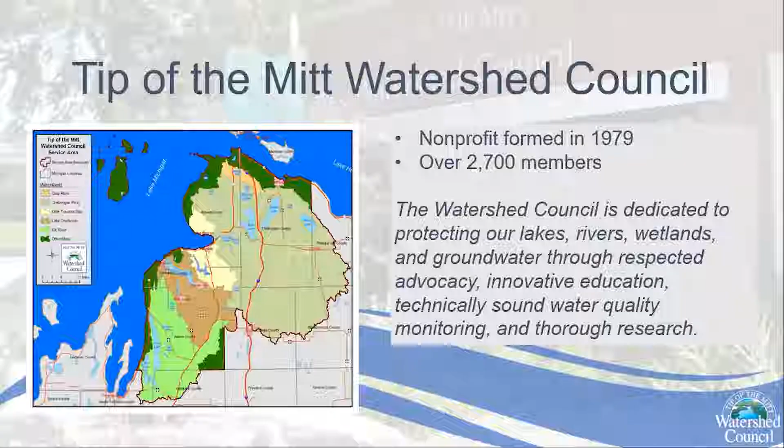The issue of Line 5 began way back in July 2010. That was when Enbridge's pipeline in southern Michigan ruptured, releasing heavy crude oil into the Talmadge Creek and Kalamazoo River. More than approximately 1.15 million gallons of oil was recovered from the river, according to the EPA. The cleanup and restoration of some 40 miles of the river took about 5 years to complete and cost Enbridge approximately $1.21 billion. This failure represented one of the largest inland oil spills affecting waterways in U.S. history and is one of the most expensive cleanups to date.

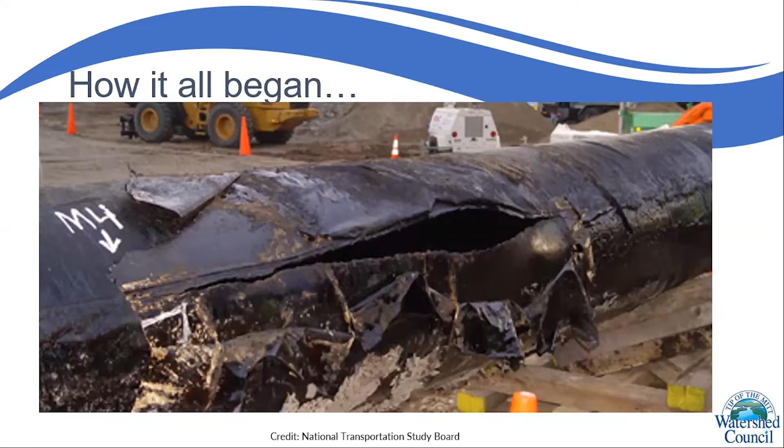In light of this spill, it was not surprising that public and governmental attention turned to the older pipelines running throughout Michigan, including Line 5 under the Straits of Mackinac, and began looking at the devastating ecological and economic damage that would occur if any of these pipelines failed.

To look at Line 5 in the larger context of pipeline infrastructure, Enbridge operates the world's longest crude oil and liquid transportation system across the US and Canada. Line 5 is part of what is called the mainline system. With nearly 8,600 miles of active pipe, Enbridge's mainline pipeline network has the capacity to transport 2.85 million barrels a day of light and heavy crude oil.

The mainline originates in Edmonton, Alberta, and extends east across the prairies. The pipeline crosses the US-Canadian border in Manitoba, where it joins the Enbridge Lakehead system, aptly named because it goes right around and through our Great Lakes. At Clearbrook, Minnesota, the mainline receives US crude oil from the Enbridge North Dakota pipeline and connects with the Minnesota pipeline that can deliver crude oil to refineries in Minnesota and Illinois.

At Superior, Wisconsin, the mainline branches into two segments. The northern pipeline passes through northern Wisconsin and Michigan before crossing into Ontario at Sarnia. The southern leg contours south of Lake Michigan to Lockport in Chicago and Illinois before turning northeast and passing through Indiana and southern Michigan, where it also re-enters Canada at Sarnia, Ontario.

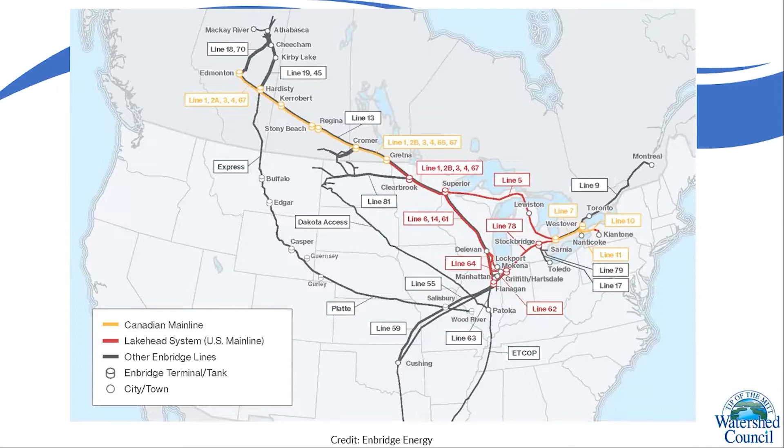Line 5 is a 645-mile petroleum pipeline owned and operated by Enbridge Energy Limited Partnership. 547 miles of that pipeline are in Michigan. It runs from Superior, Wisconsin, across the UP, through northern Michigan, down to the Thumb region, and over to Sarnia, Ontario. Through this path, the pipeline crosses 19 of Michigan's 83 counties, representing approximately 9% of the state population.

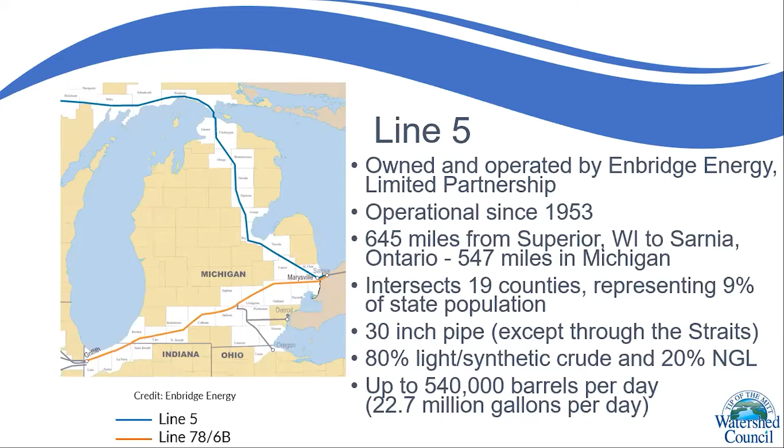Line 5 is 30 inches in diameter, except when crossing the Straits of Mackinac, where it divides into two 20-inch diameter pipelines. The line became operational in 1953 and carries up to 540,000 barrels, or 22.7 million gallons, of light crude, synthetic crude, and natural gas liquids per day.

At the Straits of Mackinac, Line 5 is divided into two parallel pipelines, each 20 inches in diameter, extending more than 4 miles across the lake bottom. The pipelines are buried 15 feet deep until about 70 feet of water depth. Deeper than that, the pipes were laid directly on the lake bottom.

The 20-inch diameter pipes in the Straits have a wall thickness of approximately 0.812 inches, which is much thicker than the rest of the pipeline infrastructure.

The maximum operating pressure for the Straits pipeline is 600 PSI, and the pipelines are generally operated around 200 PSI, with a daily range of 0 to 300 PSI. The portions of the pipeline in the Straits have automatic shutoff valves, which will shut off automatically if the pressure drops.

These automatic shutoff valves take approximately 3 minutes to close. There's also electric backup generation at the Straits to ensure the valves can operate during a power outage. According to Enbridge, if the valves close correctly, the approximate volume of oil released from a single pipeline between those valves would be 4,950 barrels.

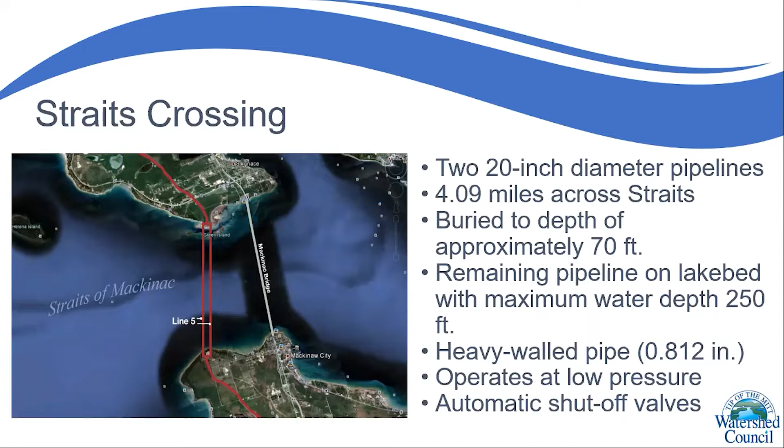That equates to 207,900 gallons. An independent risk analysis commissioned by the state of Michigan found that a worst case scenario release of 58,000 barrels, or 2.4 million gallons of oil, from a double rupture of the Straits pipeline would result in nearly $1.9 billion in costs for cleanup, property loss, lost income from tourism, recreation, and other damages.

Line 5 is most notably known for crossing the Straits of Mackinac, but it also crosses under multiple rivers and streams, goes through miles of wetlands, and crosses under many of our sparkling inland lakes. It crosses approximately 400 water bodies across the state of Michigan.

In northern Michigan, Line 5 crosses the Indian River, the Little Sturgeon River, Pigeon River, and Upper Black River, and traverses within a few miles or less of Twin Lake, Paradise Lake, Mud Lake, Monroe Lake, Mullet Lake, Douglas Lake, and Burt Lake. These inland portions can pose just as great, if not greater, threat to our waters due to basic construction, operation, and maintenance of the line.

As mentioned, the wall thickness in the Straits was thicker than the rest of the line. The inland pipeline is only 0.281 inches thick, compared to 0.813 inches at the Straits. Along with the thinner pipe, it operates at a higher pressure. In addition, it has a side seam, which the Straits portion of pipe does not have. The seam can be subject to stress cracking and could cause an inland pipe to be more vulnerable.

The inland portion is also not subject to the same inspection frequencies as the Straits. U.S. Coast Guard personnel and local emergency managers both pointed to the stretch of Line 5 along US Highway 2 near Lake Michigan's northern shore as their greatest concern. They cited as primary concerns less robust technology, such as pipeline wall thickness and monitoring equipment, higher vulnerability to an errant strike, potential access problems for containment and cleanup equipment, and difficult terrain and environment for cleanup activities.

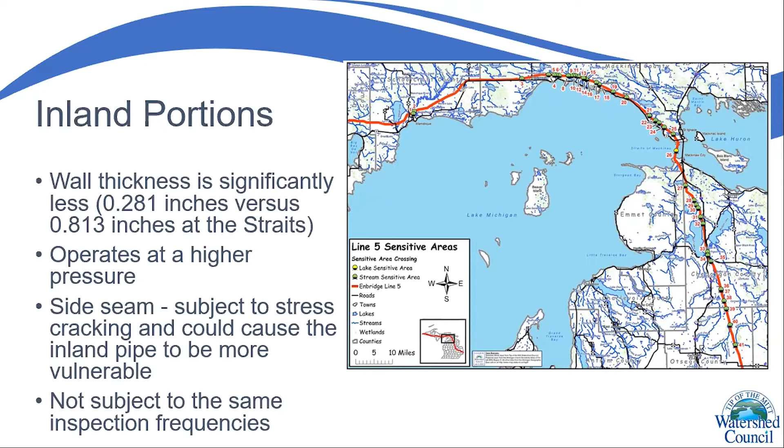On April 1st, 2018, we were lucky. We managed to somehow avoid a complete catastrophe when a 6-ton anchor from a barge and tugboat was dragged through the Straits of Mackinac. The crew had no clue it was being dragged on the lake bed until nearly 2 days later when it came to port.

The anchor dented Enbridge Energy's dual Line 5 oil pipelines and sliced American Transmission Company's 2 underwater power cables, causing $100 million in damage to the cables and releasing 600 gallons of dielectric fluid, basically mineral oil, into the Straits. Thankfully, there was minimal risk to the fisheries and wildlife.

On Line 5, there were 2 dents in the west line and 1 in the east line. The coating was also damaged in 4 areas, with it down to bare metal in at least 2 spots.

As a result, the Michigan Department of Natural Resources immediately issued a no-anchor rule. That was followed by the US Coast Guard approving in 2018 a restricted navigation area, effectively designating it as a no-anchor zone. No vessel may now anchor or loiter within the restricted navigation area at any time unless they get permission from the captain of the port in Sault Ste. Marie. However, in an emergency, vessels are allowed to deviate from this regulation if deemed necessary to avoid endangering people, the environment, or property.

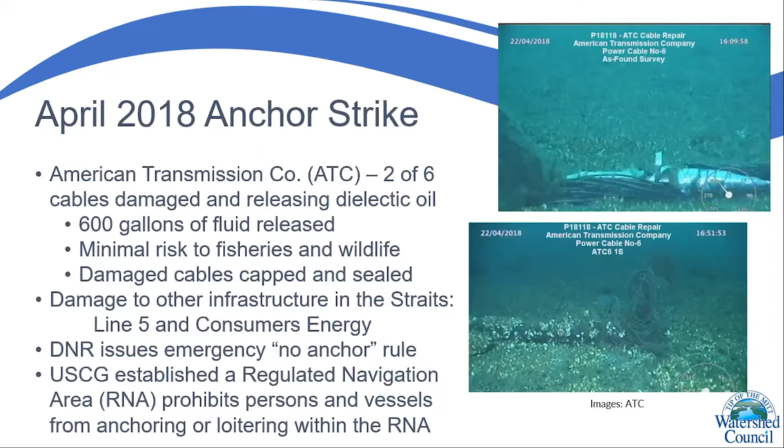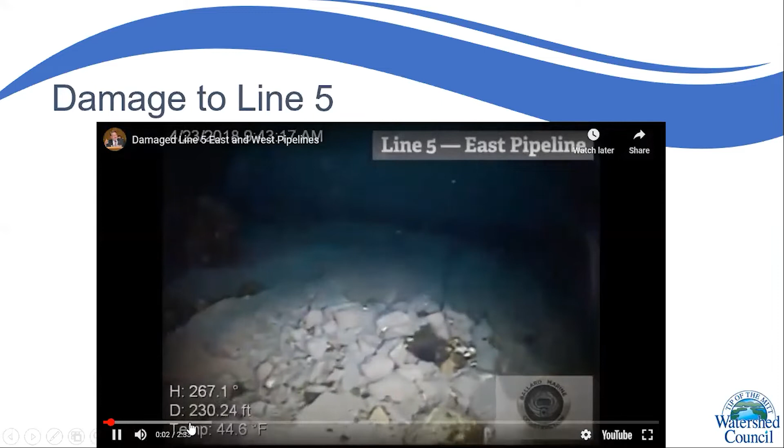Here's a video showing some of the damage, sped up for the sake of time. You can see this is the east line, with the biota missing from the pipeline where the anchor hit, and an area where the coating has been taken off. Obviously, we were extremely lucky that nothing more significant happened.

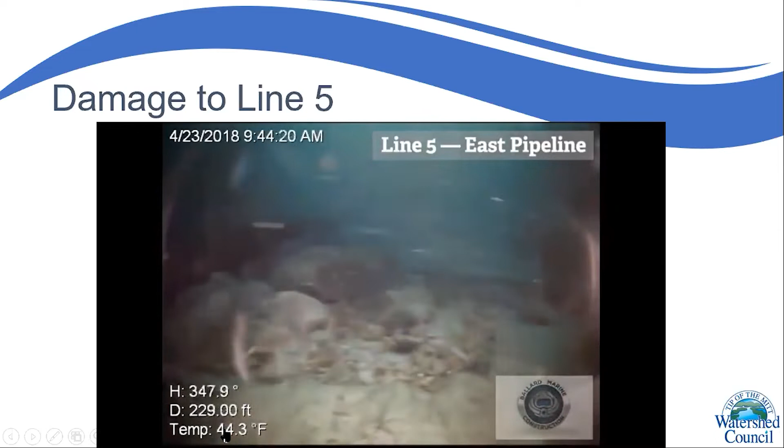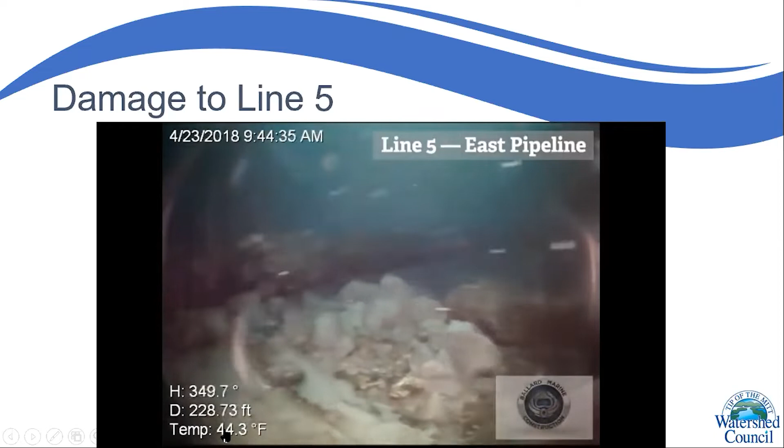There's a big difference between the biota on the left and right versus where it's showing where the anchor struck.

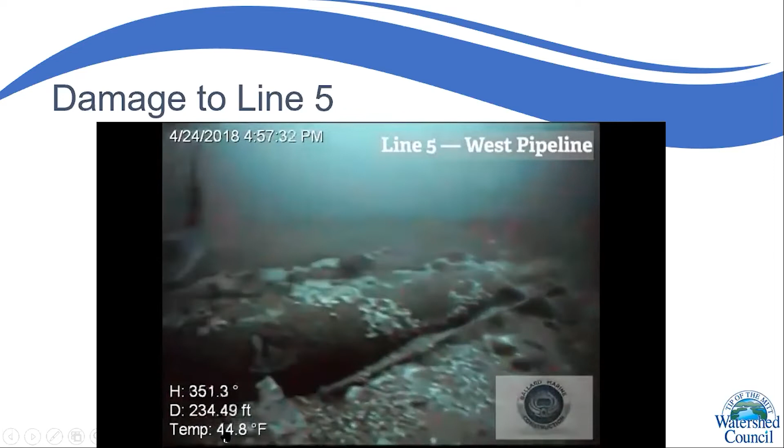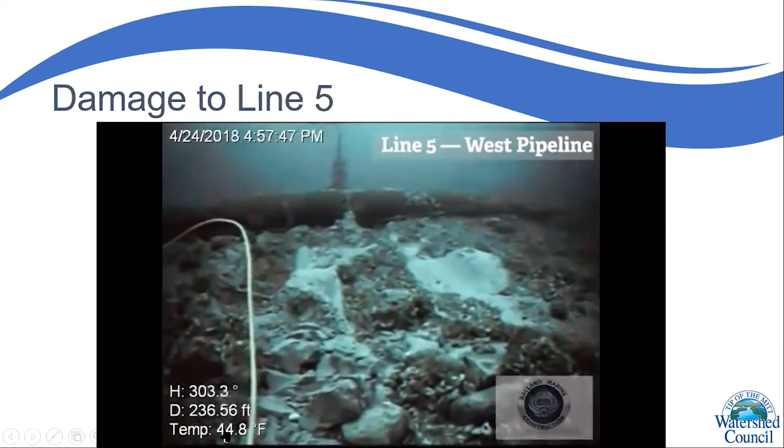Now that moves over to the west line. This footage was obtained by Enbridge, by one of their contractors after the incident. You can see the damage to the bottom land of the lake caused by the anchor being dragged.

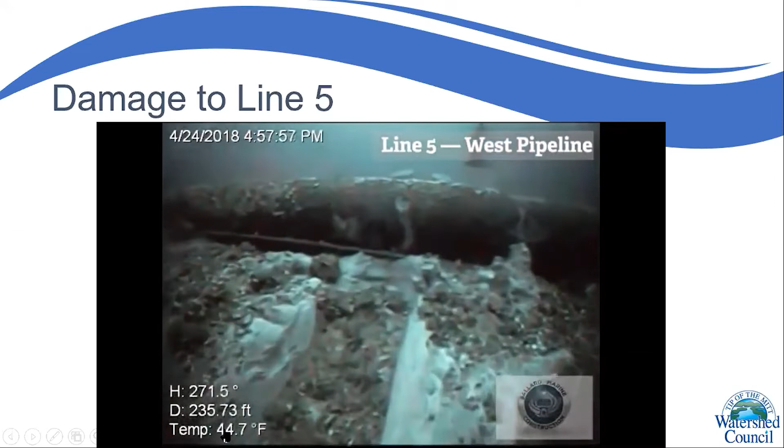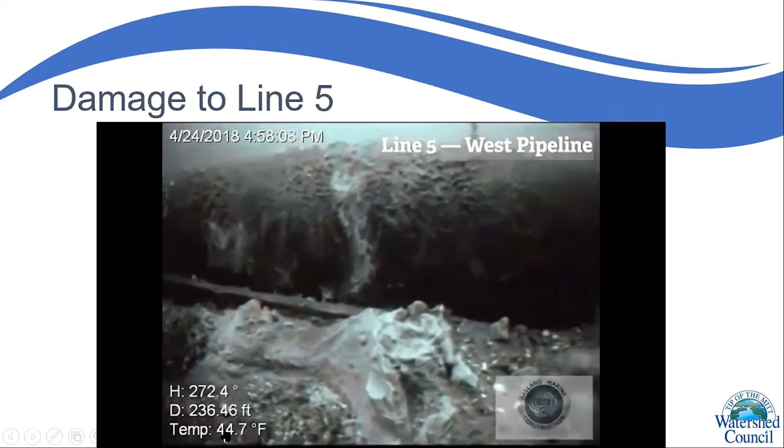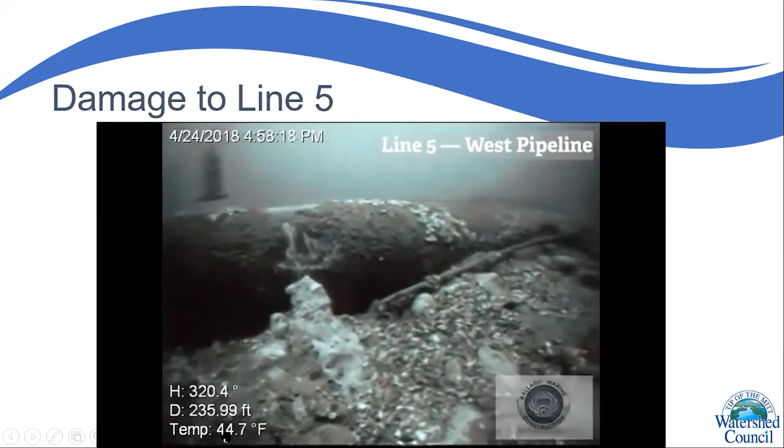Clearly, that's where the anchor hit. Once again, you can see not only the biota, the mussels, are missing, but as it gets close, the coating is missing and it's down to bare steel.

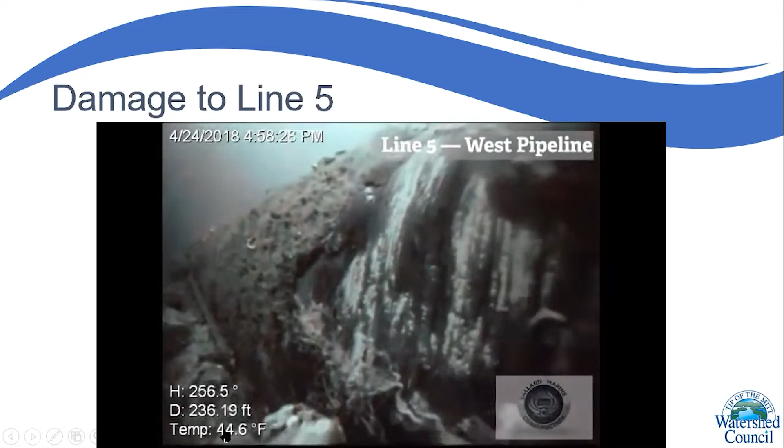So Enbridge responded to this incident by instituting a number of measures to try and enhance safety in the straits, basically trying to avoid future anchor strikes. They put in a number of measures, including patrol vessels that will monitor ships in the straits to determine if their anchors are up.

In addition, Enbridge has put cameras at the straits on Enbridge facilities, which are onshore, to monitor ship traffic 24 hours a day, 7 days a week. This is extremely important for the times when these Enbridge support vessels are unable to actually be out on the water.

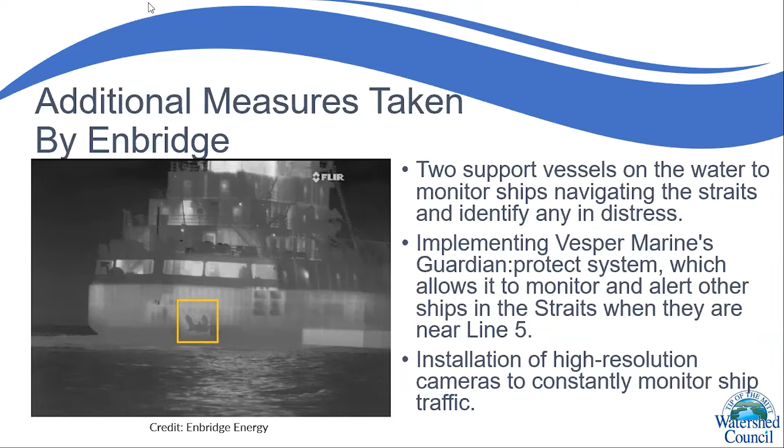There were a number of task forces and boards, including the Pipeline Safety Advisory Board, which I sat on for 3 years, that worked to identify measures to minimize the risk and improve emergency management for pipelines, not only Line 5, but pipelines throughout the state of Michigan.

During that process, the state under Governor Snyder began signing agreements with Enbridge. In the end, 3 agreements were signed covering a variety of issues. The agreements covered when the pipeline had to be temporarily shut down, replacement of the pipeline in the St. Clair River, inclusion of radar systems to monitor wave heights in real time, and also required Enbridge to carry $1.8 billion in financial assurances in the event of a spill.

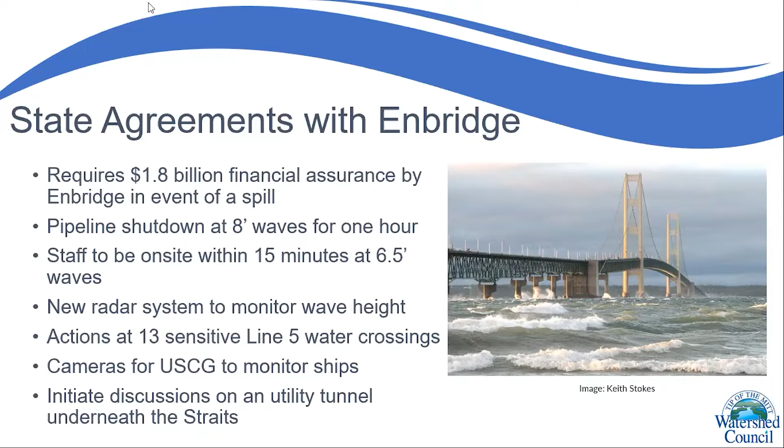But most importantly, the state and Enbridge announced in the second agreement that the two entities would discuss a further agreement around the design, construction, operation, management, and maintenance of a tunnel under the straits for the replacement of the dual pipelines. This was really the official beginning of the Great Lakes Tunnel project.

It was further solidified in December of 2018 when the Mackinac Straits Corridor Authority approved an agreement with Enbridge to build the tunnel beneath the Straits of Mackinac. That agreement was approved by the Mackinac Straits Corridor Authority during their very first meeting, which was just one week after former Governor Rick Snyder signed a lame duck bill that created the 3-person panel.

The tunnel agreement contains milestones for construction progress, as well as financial penalties if Enbridge misses deadlines that are within their control. So it would not include delay of permits or lawsuits.

Once the tunnel is complete, ownership will be turned over to the Mackinac Straits Corridor Authority, which will be able to lease space within the tunnel to Enbridge or other utilities if deemed feasible. Enbridge will get a 99-year lease as part of this agreement.

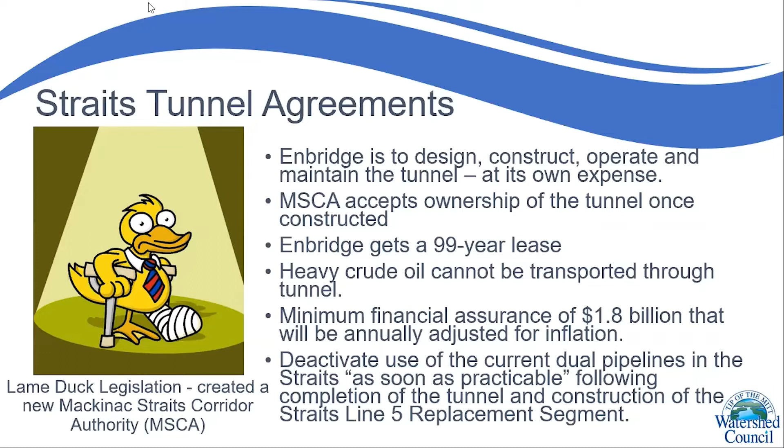One of the primary arguments made by Enbridge and others is the need for the pipeline to maintain the propane supply for the UP. To address this concern, Governor Whitmer created the UP Energy Task Force by executive order. The charge of the task force is to assess the UP's overall energy needs and how they're currently being met, as well as identifying and evaluating potential changes to the energy supply and distribution, looking at the economic, environmental, and other impacts of those changes, as well as alternatives to meet the UP's energy needs.

The task force released part 1 of a 2-part report, focused on short-term steps the state could take in reaction to a disruption of propane supply to Michigan customers. The second part will evaluate the UP's energy needs through a much broader lens to ensure long-term needs are met reliably, affordably, and in an environmentally sound manner.

The first report included specific recommendations to enhance the reliability of propane supply in the UP, and a detailed analysis of alternative means of supplying propane if the current supply, which relies in part on Line 5, changes. Key findings showed that shutting down Line 5 need not cause propane shortages or large price spikes, which is often claimed.

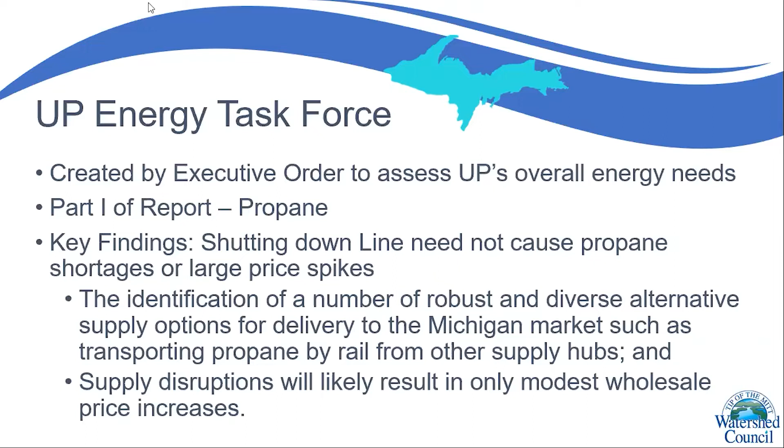Geotechnical borings was one of the next big things Enbridge conducted for the tunnel project. Enbridge completed a $40 million geotechnical investigation in the Straits, finished by November 2019. The boring work was to get sediment and rock samples from the lake bed to determine the feasibility of the tunnel and guide its design and that of the tunnel boring machine.

Samples were taken in 27 locations: 7 were on shore, 6 were near shore, and 14 were in deep water.

There was recently a report by an independent contractor, Jacobs, hired to analyze the geotechnical investigation and assess the level of risk of tunneling based on it. It concluded the investigation was insufficient and does not adequately characterize the anticipated ground conditions on the site. A significant span of the tunnel alignment does not have any borings that reached the proposed tunnel depth, which could lead to significant challenges when tunneling.

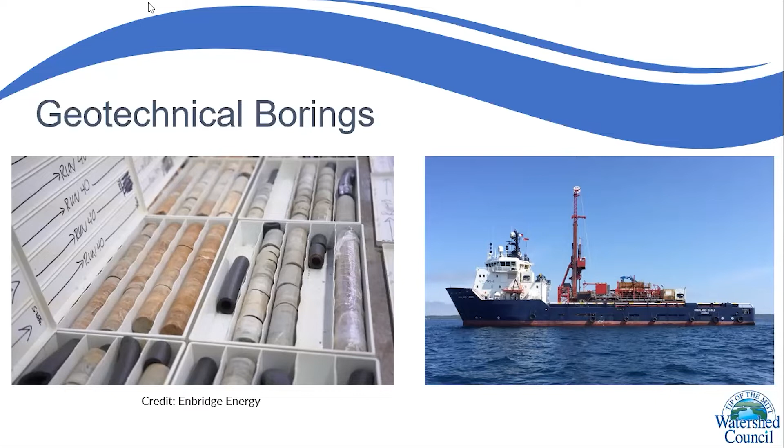In June of last year, there was another incident when Enbridge was working on Line 5 in the Straits. They discovered a screw anchor support had shifted from its original position. This support was installed in 2018 on the east leg, and it lied about 150 feet away from spots on the pipeline where the protective coating had worn away and bare metal was exposed. Enbridge was ordered to shut down both the east and west legs of the pipeline by a judge.

They were allowed to restart the west leg to perform an inline inspection, running what they call a pig through the line to check for integrity issues, and were allowed to continue operating that line based on the results of that inspection.

The east line, where the damage was found, had to remain closed until the federal agency, the Pipeline and Hazardous Materials Safety Administration, completed an investigation. After being shut down on June 19th due to the damage found, Enbridge was allowed to restart the east leg of Line 5 on September 9th, after the agency noted it had not identified any integrity issues.

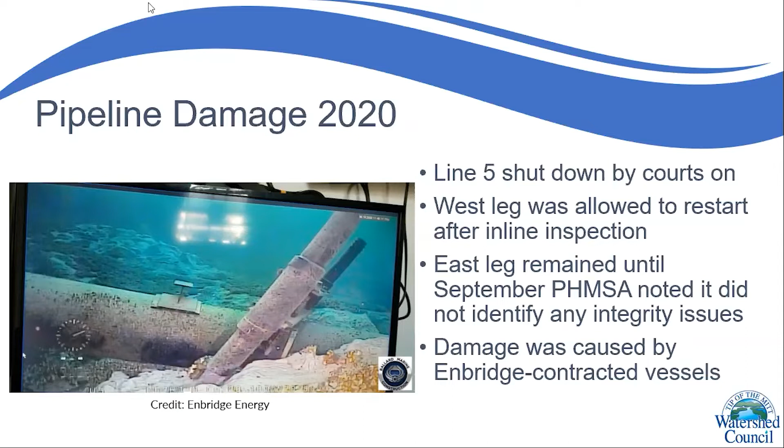It's also worthwhile to note that during the more than 3-month shutdown, there was no gas shortage and no impact on gas prices. According to an Enbridge fact sheet, a temporary shutdown would have severe consequences for Michigan's economy and result in about 45% less crude flowing to refineries in our region. Importantly, this did not come to fruition during the temporary and partial shutdown.

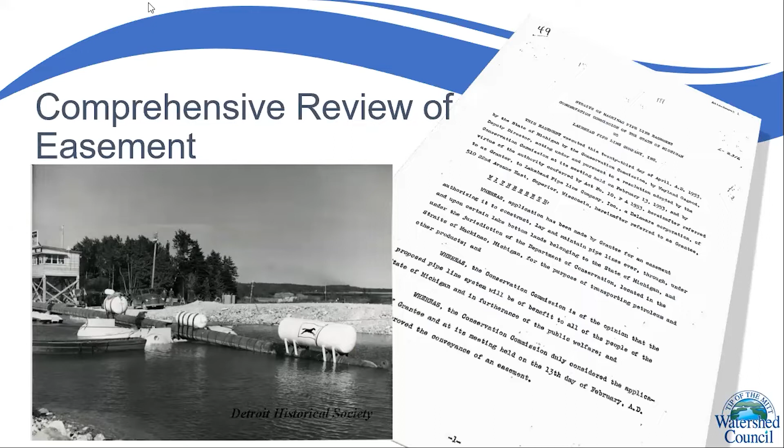After these multiple incidents, Governor Whitmer directed the Michigan Department of Natural Resources to begin a comprehensive review of Enbridge's compliance with the 1953 easement. The easement created the terms and conditions under which Enbridge could operate the dual pipelines on the bottomlands of the Great Lakes.

According to the state, one of the provisions is the due care provision, in which Enbridge is expected to, at all times, exercise the due care of a reasonably prudent person for the safety and welfare of all persons and of all public and private property.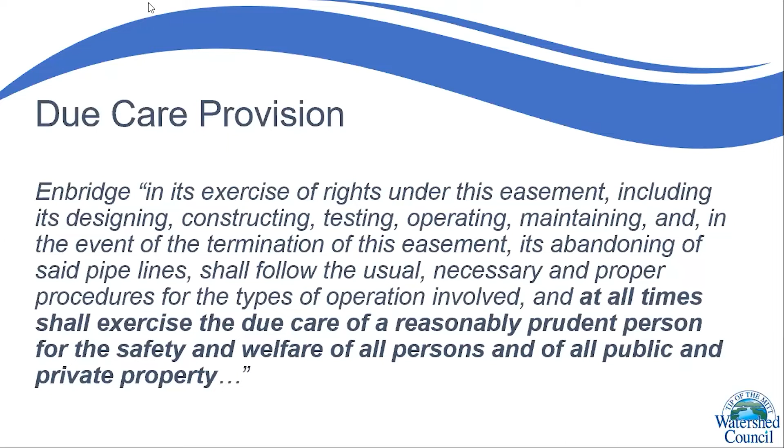According to the state, Enbridge has failed for decades to meet its compliance and due care obligations under the easement, and it remains in violation of those obligations. There's nothing Enbridge can do to change its past behavior and disregard for its duties under the easement, and its breaches of the easement's terms and conditions cannot be corrected or otherwise cured.

So the state has said Enbridge has not and is not exercising due care in operating the pipeline. The easement requires that each pipeline be physically supported, meaning it either rests on the lake bed or is supported by some other structure or device, such as these screw anchors, at least every 75 feet. That's to protect the structural integrity of the pipeline from stresses and vibrations caused by the strong currents surrounding it. The state has said that for virtually the entire life of the easement, Enbridge has ignored the 75-foot span requirement.

Documents provided by Enbridge confirm that since at least 1963 and continuing through 2012, Enbridge has known that multiple unsupported spans exceeded the 75-feet limit, but failed to take remedial action to address the non-compliance. The longest span was noted at 286 feet. And between 2005 and 2016, there were nearly 250 instances where spans exceeded 75 feet.

It's also noted that Enbridge failed to take timely corrective action. There were delays of up to 3 to 5 years to repair 17 non-compliant spans, 7 years to repair 11 spans, and another 9 years to repair 17 spans. Just to make sure everyone understands what we're talking about...

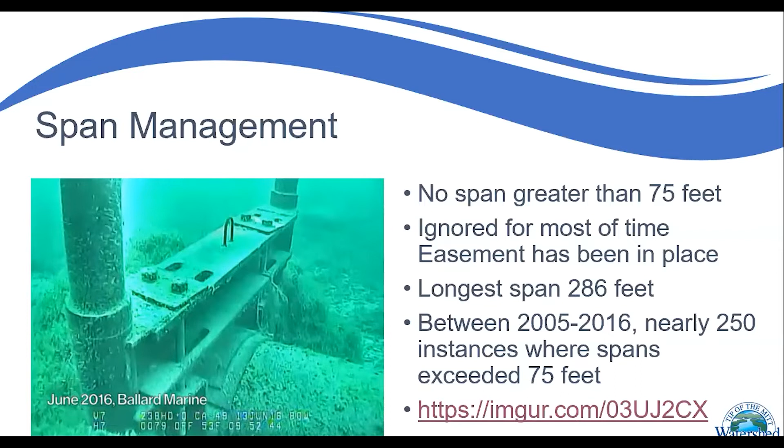So again, you can just see how the anchors have been added over the years.

Coating concerns: the easement requires Enbridge to maintain a multi-layer coating on the pipelines. This protective coating is intended to prevent the steel from being exposed to environmental factors that would cause corrosion or other physical damage. Since at least 2003 and continuing until 2014, Enbridge was on notice that the heavy biota accumulation, the invasive mussels you saw earlier in the video, on the Straits pipeline made it impossible to do a detailed analysis of the integrity of the coating.

In reading a report Enbridge submitted to the EPA, I came across the word 'holiday.' Most of us think of holiday as a good thing, but in this industry, it means an area where pipeline anti-corrosion coating is missing.

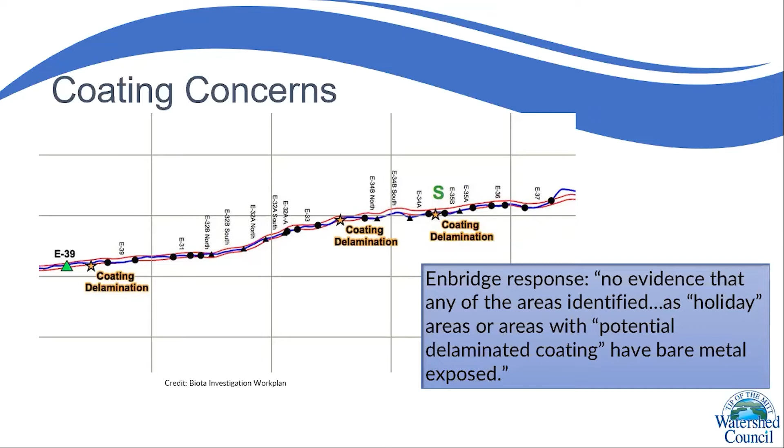Enbridge's initial response when this was found was that there is no evidence that any of the areas identified as holidays, or areas with potential delaminated coating, have bare metal exposed. But after initially telling the state there was no bare steel, Enbridge revealed, after additional investigation, that there were in fact coating gaps, more than originally announced, some as large as 16 inches.

That included bare steel, as well as a white calcareous deposit found along many segments of the pipeline. In fact, Enbridge knew of these issues for 3 years prior and did not tell the state, nor did they attempt to address them.

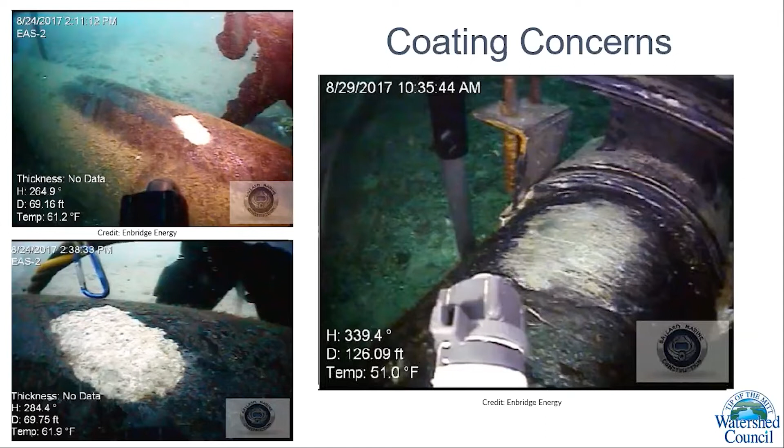The easement includes a condition that the minimum curvature of any section of the pipe shall be no less than 2,050 feet radius. The pipe on the bottom of the straits is not straight because the bottom of the straits is not straight, so this condition relating to pipeline curvature limits stresses placed upon it. Inspection reports identified 20 to 25 exceedances of the easement's minimum pipe curvature requirements.

According to the state, Enbridge ignored the curvature mandate of the easement, perhaps from the very beginning with installation, and non-compliance with the curvature condition continues today and remains uncorrected.

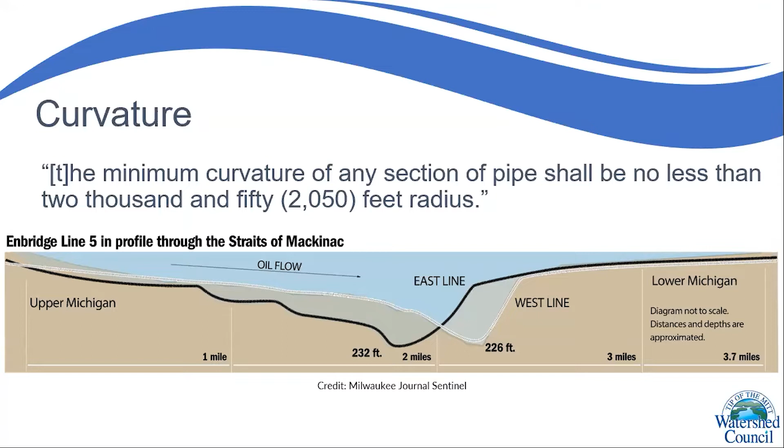After the 15-month review, the governor and DNR director notified Enbridge that the 1953 easement allowing it to operate in the straits is being revoked and terminated. They also filed a lawsuit asking the Ingham County Court to recognize the validity of that action.

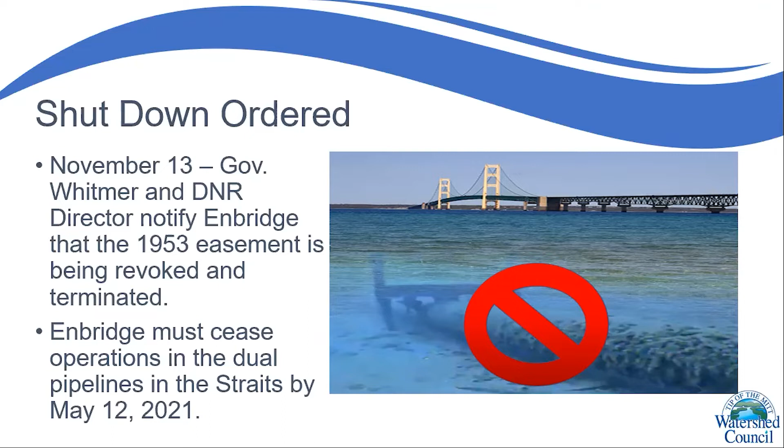The state is revoking the easement for violation of the public trust doctrine, given the unreasonable risk that continued operation of the dual pipelines poses to the Great Lakes, which the state holds in trust for the citizens of Michigan. Transporting millions of gallons of petroleum products every day through 67-year-old pipelines that lie exposed across the entire span of a busy shipping channel presents an extraordinary and unacceptable risk.

The dual pipelines are vulnerable to anchor strikes and similar dangerous impacts, along with the inherent risks that come with pipeline operations. The state is also terminating the easement based on Enbridge's persistent and incurable violations of the easement's terms and conditions. The notice requires Enbridge to cease operations by May 12th of this year, allowing for an orderly transition that protects Michigan's energy needs over the coming months.

Enbridge replied to the state of Michigan, stating they will not shut down the pipeline in May. In fact, Enbridge then sued Governor Whitmer and the DNR in federal court to challenge the state's decision to revoke and terminate the easement.

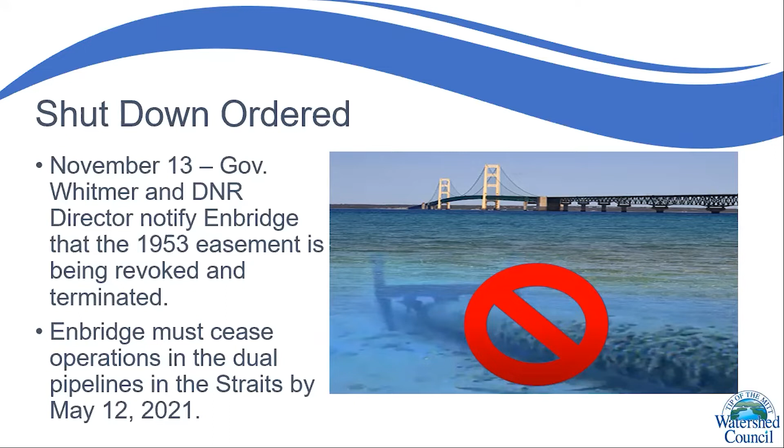This lawsuit seeks a federal ruling that federal commerce and pipeline safety laws preempt the state's attempts. The suit invokes the supremacy clause of the US Constitution, which the company argued places federal pipeline safety law above state law, the Commerce Clause, which stops states from taking protectionist actions affecting interstate commerce, and the Foreign Commerce Clause and Foreign Affairs Doctrine, which prohibits state policies from interfering in foreign affairs.

All the while, Enbridge has been in the process of seeking approval to construct and operate the pipeline within the tunnel below the bottomlands of the Straits of Mackinac.

Enbridge is proposing an approximately 3.58 mile tunnel between Point LaBarbe in the UP and McGulpin Point in Michigan's Lower Peninsula. The tunnel has been projected to cost $500 million, although there is question about the cost because that estimate was made early in the planning when the tunnel was proposed to be 10 to 12 feet in diameter. Now the proposal is to build an 18 to 21 foot diameter tunnel constructed using a tunnel boring machine.

It's often promoted that the tunnel will be constructed at no expense to Michigan residents, and this is not true. $4.5 million has already been appropriated in 2018 for the planning, oversight, and legal services related to the proposed Mackinac Straits Tunnel project. So in reality, all of us as Michigan citizens are in fact paying for the Line 5 tunnel.

Construction is proposed to start on the south side, in Mackinaw City. Once it begins, construction activities are expected to occur 24 hours a day, 6 days a week for an estimated 2 years. On the north side, construction activities are expected to average 12 hours per day, with some activities requiring 24-hour operations, primarily breaking up the rock, which may be completed through drilling or blasting with some explosives.

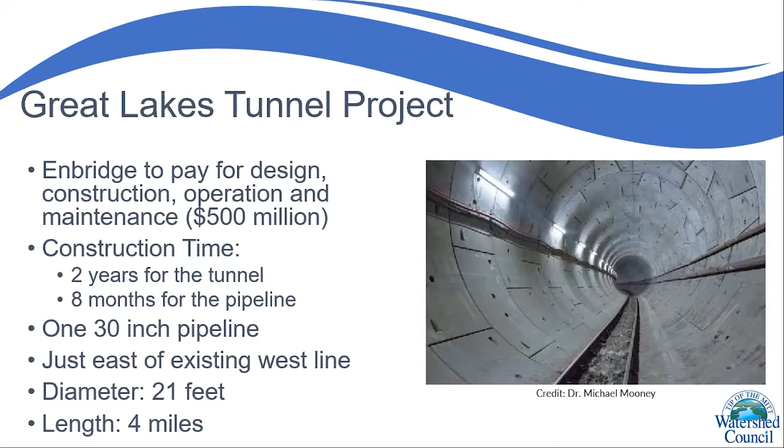The tunnel will be constructed through rock and, in the deep channel in the Straits, through glacial deposits. The top of the tunnel will be approximately 60 feet beneath the lake bed, and at the deepest, up to 250 feet beneath the lake bed. It will be constructed using a tunnel boring machine, and precast concrete lining will be installed as the tunnel is constructed. The annular space outside the tunnel's concrete lining will be filled with low permeability grout. That concrete liner will be a foot thick.

In the process of tunneling, approximately 364,000 cubic yards of material will be removed from underneath the lake bed. This tunnel boring machine is anticipated to average about 40 feet per day, and that's how it's determined that it will take approximately 2 years to bore and construct the tunnel, presuming there are no issues.

Enbridge has put together a really nice video that explains the process, so I'm going to show that. For the sake of time, I'm going to do the same thing I did previously.

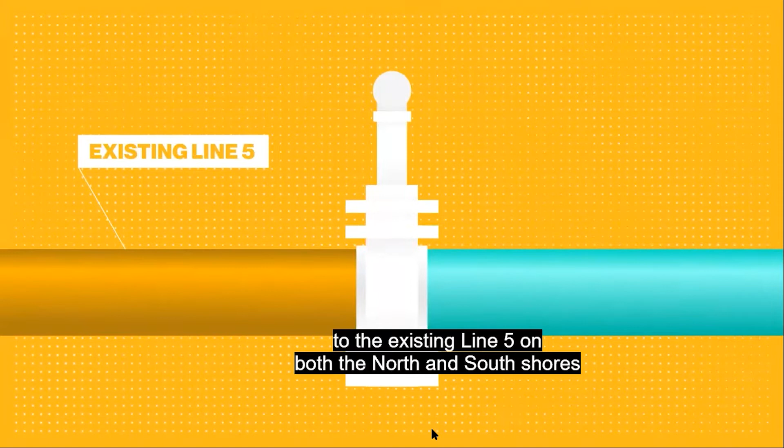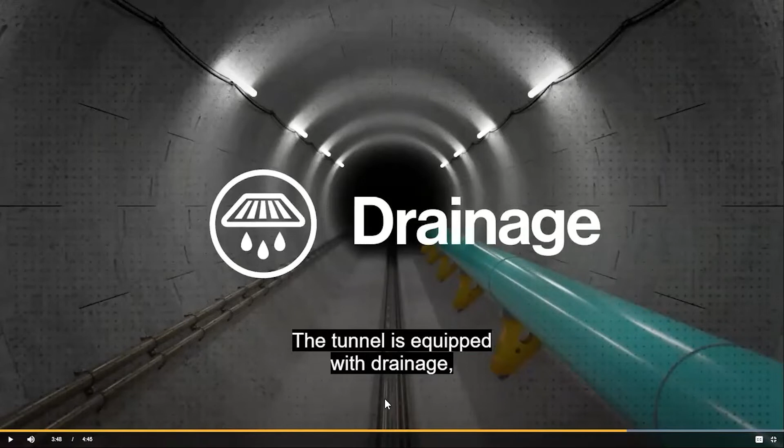So that walks you through the process. Upon completion, a new 30-inch line within the tunnel will be tied to the current upland portions of Line 5. The pipeline installation is expected to take an additional 8 months, and then the existing Line 5 would be decommissioned.

Enbridge has proposed two decommissioning alternatives for the existing pipeline. One would be that the pipeline would be purged, cleaned, and abandoned in place, remaining on the bottom of the Straits of Mackinac. The second is the pipeline would again be purged and cleaned, and this time the exposed portions would be removed, while the portions buried in sediment at or below 65 feet depth would remain in the waterway.

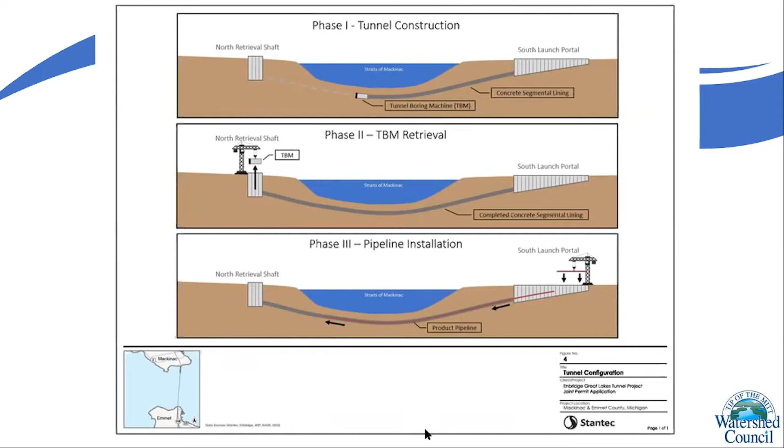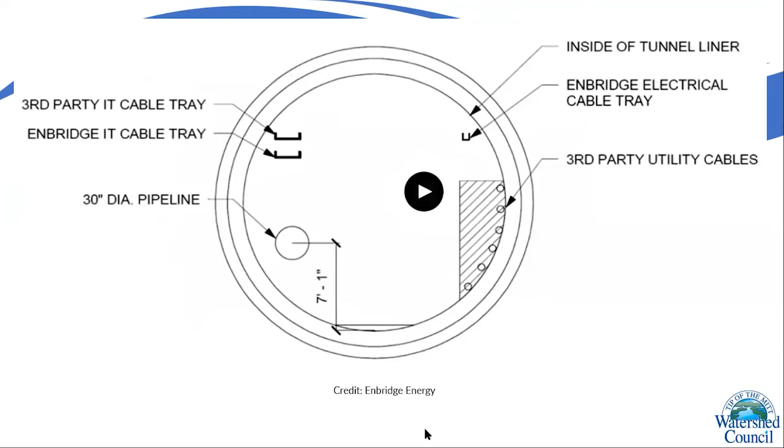The tunnel has actually been marketed as a multi-use tunnel in which other utilities such as cable and fiber optics can lease space. According to Enbridge, they've been approached recently by a third-party utility with interest: Peninsula Fiber Network from Marquette, Michigan, is currently working with Enbridge engineers to discuss feasibility. Peninsula Fiber Network works with the 911 public service system.

Before the Line 5 tunnel project can actually begin construction, Enbridge needs a multitude of approvals from state, federal, and local governments. In April, Enbridge submitted multiple permit applications, one to the Michigan Department of Environment, Great Lakes, and Energy for a permit under the authority of Part 303, Wetlands Protection, and Part 325, the Great Lakes Submerged Land Act, for impacts to the bottomlands of the Great Lakes. These permits were approved on January 29th.

However, EGLE punted many of the large decisions, such as threatened and endangered species and archaeological and cultural resources, to the federal government, in particular the U.S. Army Corps of Engineers.

The Army Corps of Engineers is still currently reviewing the proposed application. They look at it under Section 10 of the Rivers and Harbors Act, which regulates work or structures in, over, or under navigable waters of the US. They also look at it under Section 404 of the Clean Water Act, which regulates discharges of dredged or fill material into waters of the US, including wetlands.

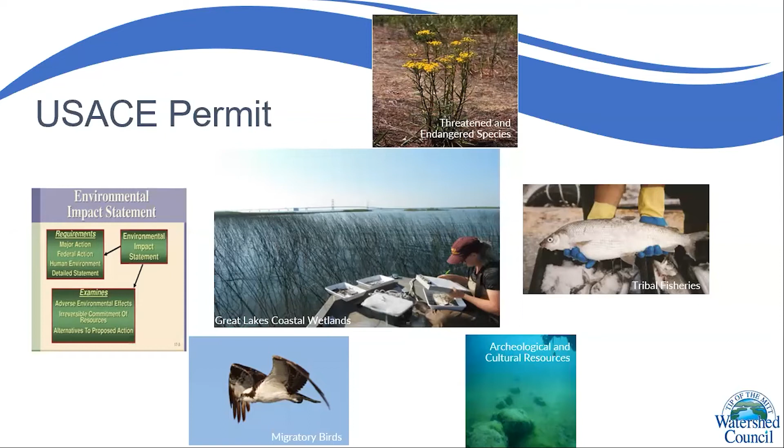And last I heard, they were working to find a university or archaeologist to conduct further analysis.

So then there's also the Michigan Public Service Commission, which Enbridge filed an application with in April of 2020. The Michigan Public Service Commission reviews these applications under what is called Act 16.

So Enbridge will be required to demonstrate that there is a need for the proposed pipeline, that the pipeline was reasonably designed and routed. In addition, they have to look at what is called MEPA, the Michigan Environmental Protection Act, so they have to look at the environmental impacts of the project and feasible and prudent alternatives.

This Act 16 process is very different from normal permit application processes. It's reviewed as part of a formal hearing process known as a contested case, which includes expert witness testimony, cross-examination, and legal counsel representing the various parties.

So Tip of the Mitt Watershed Council, in partnership with Michigan Environmental Council, National Wildlife Federation, and the Grand Traverse Bay Bands of Ottawa and Chippewa, have intervened to become a party in the case. This is the first time the Watershed Council has formally intervened in an MPSC case, and we're intervening to help ensure the case is marked by robust analysis, careful planning, and transparent information exchanges.

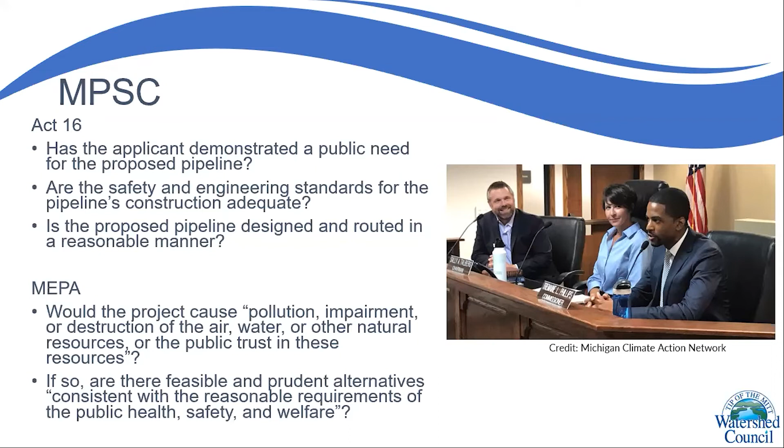So what is the future of the Line 5 tunnel project? Well, here's what we do know. We do know there are still many permits for Enbridge to obtain. The U.S. Army Corps of Engineers, the Michigan Public Service Commission, they need a soil erosion sedimentation permit, and local permits.

We do know they will not get final decisions anytime soon. We're looking fall or late this year at the earliest. Once we get those decisions, depending on what they are, there could be appeals, contested cases, or lawsuits.

We've already seen this happen with all three, with actions related to Line 5. Obviously, all of these would delay the onset of construction for the tunnel. So I can't say what will actually happen, if there will be a tunnel or not in the future. What I can say is that construction will not begin in 2021 as Enbridge had hoped.

And a new pipeline in the tunnel under the Straits of Mackinac will not be operational by 2024, as Enbridge had claimed.